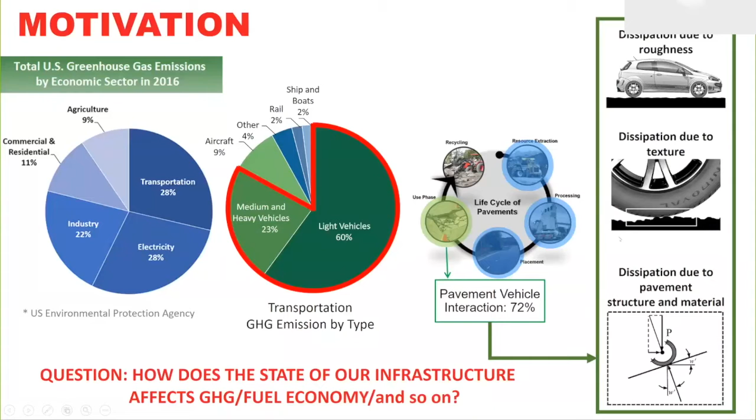Pavement vehicle interactions make 72% of the overall life cycle of pavements. It is due to roughness, dissipation due to texture, and dissipation due to pavement structural and materials. Specifically, what I'm looking at today is roughness.

Now, in a larger context, I want to raise the question here: are we doing the right thing for our infrastructure, or are we just living out the glorious time of the 1950s?

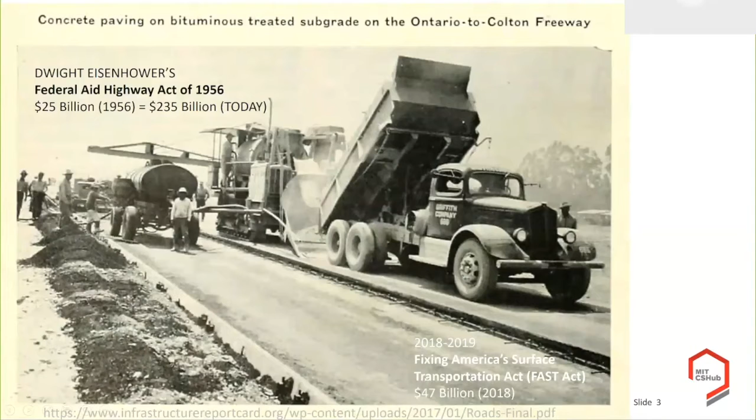On the order of $47 billion in the Transportation Act, the so-called FAST Act. It may thus be not surprising that the American Society of Civil Engineers, in its infrastructure report card,

gives the infrastructure, the road system, a grade D.

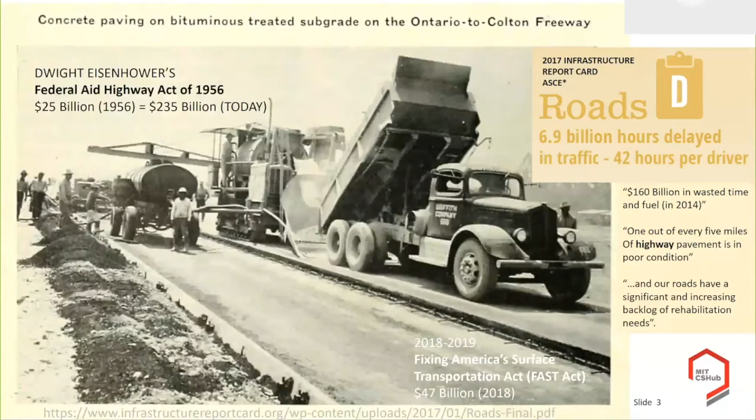With the following notations: there are about $160 billion wasted in time and fuel. One out of every five miles of highway pavement is in poor condition, and our roads have a significant and increasing backlog of rehabilitation needs.

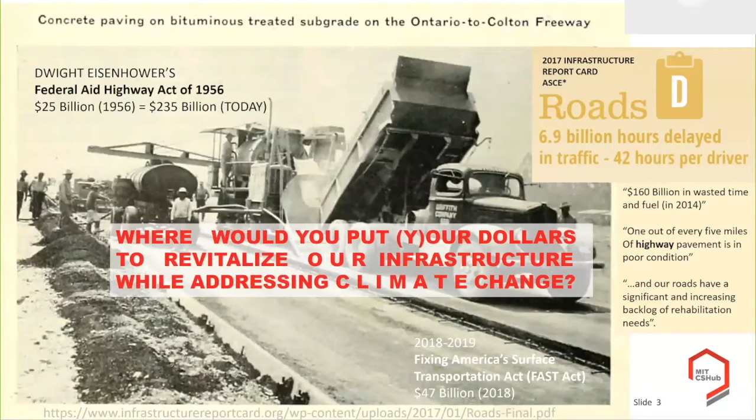So the question which I ultimately want to answer, not today, but start actually the discussion, is how can we address this? Where would you put your dollars to revitalize our infrastructure while addressing climate change?

In fact, that's what I want to do. We may be able to find out if we use smartly our smartphones. I want to convince you that we will be able collectively to provide quantitative data for decision makers.

For instance, for highway bills, but also for local bills, to assist cities and communities to reach their climate goals, for instance their CO2 emissions.

Value infrastructure for sustainable growth of our society, which has been more and more put on the back burner, that there's a value to infrastructure, and ultimately empower citizens to contribute and take charge of our built environment.

The outline of my talk will be 4 points. I need to go a little bit into the background here in order to show you how, by means of smartphone, we are able actually to predict roughness, look at excess fuel consumption, and be able to predict, to be quantitative.

I want to introduce you to an app which my students, but particularly Jake and Shahd, developed. It's called Carbin. I want to show you what this can do for you.

And then bring it all the way from an individual measurement with one phone to crowdsourcing, and introduce to you the potential of the Fix My Road project, showing network applications, vision, impact of crowdsourcing before coming to conclusions and timelines.

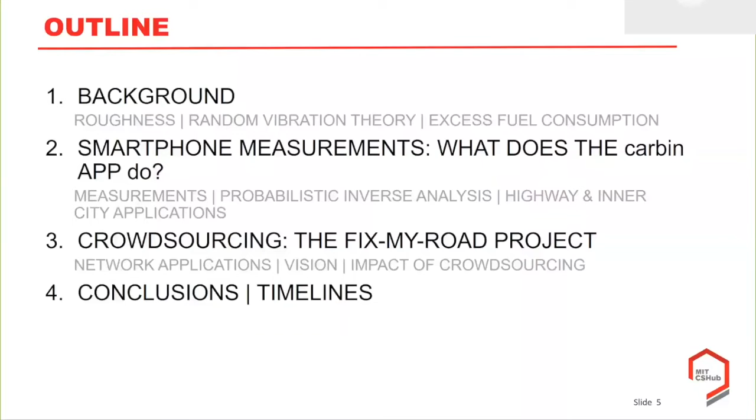As background: a common measure to quantify ride quality is the so-called International Roughness Index, IRI. It was introduced by the World Bank in the 1980s and then quickly adopted all over the world to quantify ride quality. Now, what is this roughness?

Well, the roughness basically here is the average movement of your suspension system, not in your car, but for a reference car, the so-called golden car, over a given distance length, from this measurement at a given speed V0, which is 80 kilometers per hour.

With this measurement, which can be done for instance by lasers, one can classify roads in different ways, as long as this IRI measurement is given in meters per kilometer or millimeters per meter, or in the US in inches per mile.

Here's the conversion factor: 1 meter per kilometer equals 63 inches per mile. This basically covers airport new pavements, older pavements, maintained unpaved roads, damaged pavements, rough unpaved roads, etc. The value for new pavements could be corrected a bit further downward. New pavements today can easily be done with an IRI value of 1, or 63 inches per mile delivered.

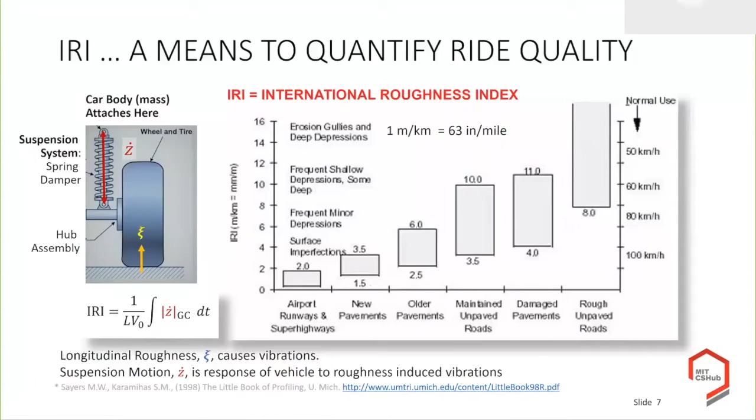So how would we actually know how this roughness introduces excess fuel consumption, environmental impact, etc.? For those less familiar with Fourier transforms, what I mean by roughness is what a surface may look like if you measure the roughness of a certain profile of the street.

Now, if you decompose this signal in the driving direction into different wavelengths, you have K, the wave numbers, from large numbers to small numbers. Then you can represent this in terms of spatial frequencies, and we wonder how much these frequencies affect fuel consumption.

For roads, typically when we look at roughness in terms of IRI, we look at wave numbers between 0.35 meters and 90.9 meters. For even smaller wave numbers, this is something which affects the texture of the tires, which also introduces additional fuel consumption.

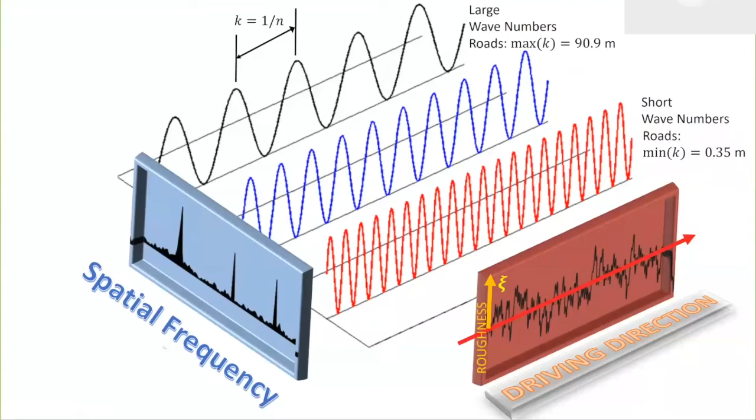So what we classically do to infer IRI from measurements, as an alternative to measuring how much in time your suspension system moves, we actually use the following form.

Here's this transformation as a function of the spatial frequency. It's called power spectral density, as you see here.

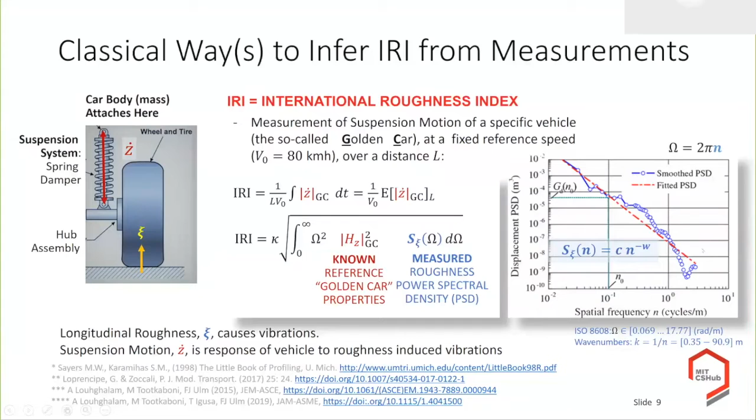If we have this measured roughness power spectral density and multiply it by some response function - this roughness to which your tire is subjected - and integrate this in some way, we are able to calculate this IRI by just knowing these relations plus these known reference golden car properties.

Well, how does roughness lead to excess fuel consumption? You immediately understand this if your suspension system is moving up and down. Each time it moves up, the speed squared times some damping coefficient will lead to an energy dissipation.

Energy dissipation means the loss of energy which we put into the system through fuel into our cars, and then we can calculate the energy dissipation or the excess fuel consumption that results from the suspension system. We may want to add the energy dissipation that occurs in the tire, but today I will only focus on the suspension system.

There has been long-standing work done by Professor Chatti here in the United States to identify the excess fuel consumption percentage as a function of this IRI measurement, and it depends on the speed, etc. Clearly, the rougher it is, the more excess fuel consumption we consume because we don't like a rough ride.

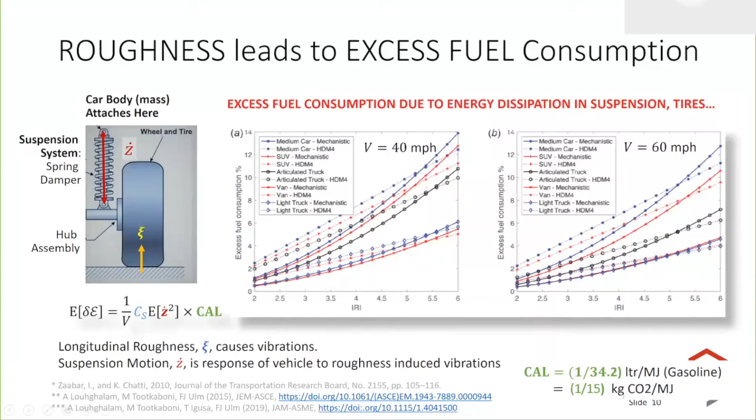In addition to CO2 emissions, one can think about particle matter, NOx, and many other things. More specifically, I'm very much interested in identifying not only the amount of fuel which we spend in excess of just running our motors at a given speed, but this excess fuel and environmental impact that results from the roughness.

In fact, one can analytically determine this. If we have a measured roughness, we multiply it again with some function where the vehicle properties come into place—but this is your vehicle, not a reference vehicle, which is used classically for IRI. We are able to determine the excess fuel consumption, the energy dissipation in the suspension system. So a key input here is this roughness value, and the vehicle properties of your car, if they are known.

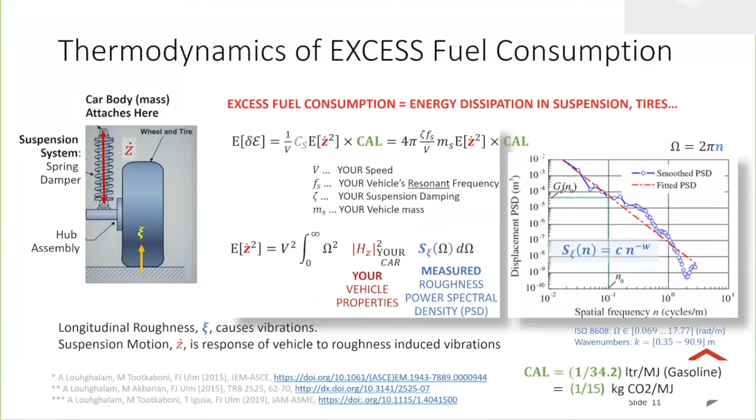Now, how does that relate to smartphone measurements? In a smartphone, all smartphones today have acceleration built in, so we can actually record in time the acceleration of a smartphone, specifically the vertical acceleration. We can then relate this acceleration in a similar fashion to, on one side, this roughness characteristic power spectral density of the road on which we are driving—that's dependent on the geography—and multiply this with the appropriate properties that relate to your car.

But what we would need for that is to know the properties of your car. The theory is now relatively well established, so it should be pretty much straightforward in a forward application, if this was known, to determine how much energy we consume. However, obviously, we don't know your vehicle properties, nor do we know what the roughness properties are.

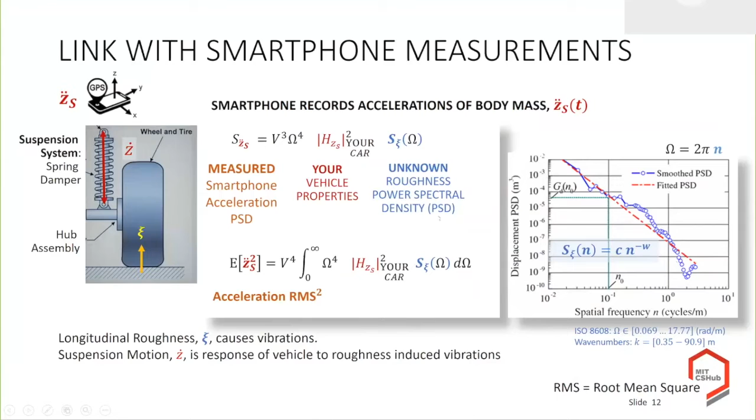We don't have a laser profiling the road. So the question of this approach consists of taking smartphone records, the acceleration of the body mass—a phone fixed smartphone attached to the body mass. We need the speed, and we need the position in order to map it.

And the output, in return, what we would do by an inverse analysis is to determine the vehicle properties, the roughness power spectral density, and of course the International Roughness Index, which is used for many other applications, particularly for maintenance, the excess fuel consumption, environmental impact, and ultimately the mapping.

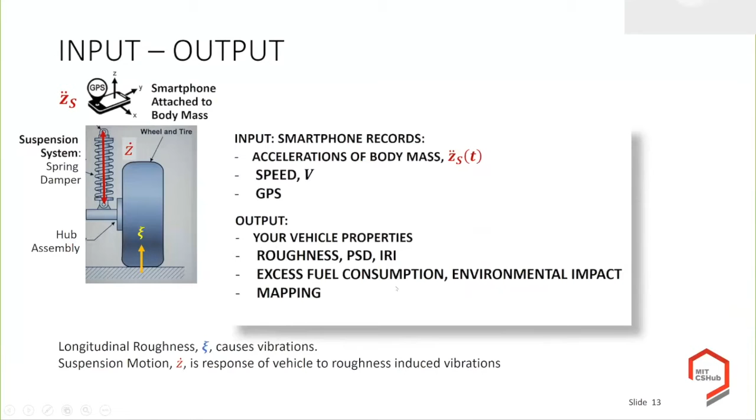Now, this may sound so straightforward that one needs to go backwards and realize, well, this should have been in the books for quite some time. When you make a literature search, what exists are basically three types of approaches. One is an ad hoc engineering approach: if you have an acceleration, you integrate it twice, obtain some displacement, and eventually relate this to roughness. Of course, if you do this, you assume basically that you drive a rigid vehicle, so that can be but an extremely rough estimate of the system.

Actually, this type of technique came from the pothole bump approaches, which there are many of out there, which register the occurrence of potholes in the street by means of acceleration. But it has been applied also to IRI. The problem here is that this assumes a rigid vehicle.

Then there are many correlation approaches out there. They go all back, I would say, to a patent which Google brought forward, where you correlate something to the IRI, which you measure from the acceleration, and hope that the correlations will work. The problem with correlations is, of course, that they're not necessarily transferable unless you have artificial intelligence, etc., which learns permanently the entire system. So you need to calibrate already your artificial intelligence in order to have the answer, which of course limits this approach. In addition, it does not consider all the fine things which one can actually do with the accelerations.

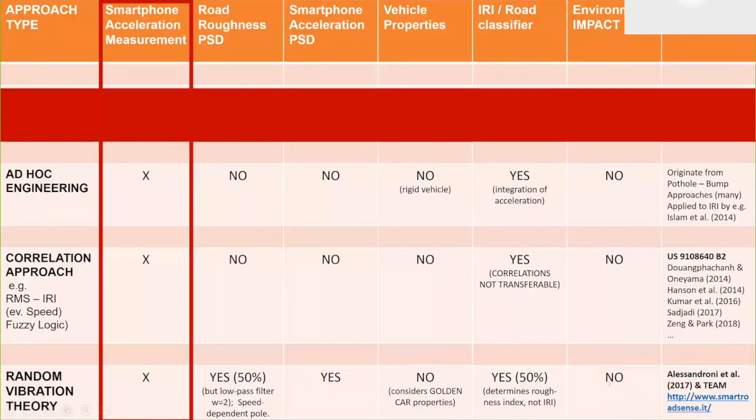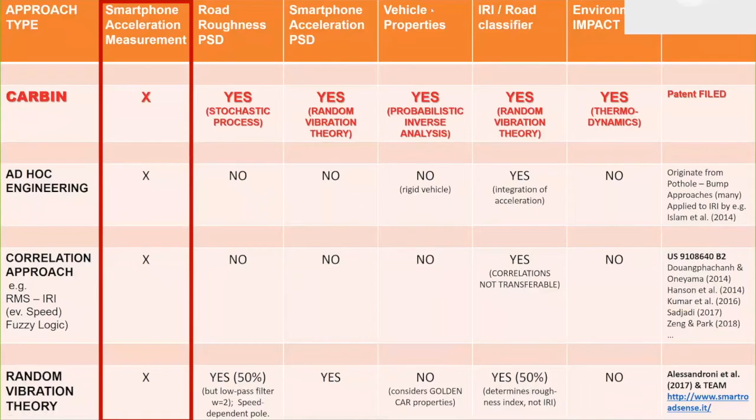Because of this, we wanted to bring all these different elements together with Carbin, where we considered the stochastic process, the random vibration theory. Vehicle properties need probabilistic inverse analysis, IRI classifier from random vibration theory, and the environmental impact from elementary thermodynamics. That's what we call the Carbin approach, which is in this app.

It started as a student project. It's currently a research tool, but has all the potential to move into startup technology as we try to scale up these measurements for a large-scale application of this app.

So how does this Carbin app actually work? You have the classical situation: a smartphone mounted in a fixed position inside the vehicle—it shouldn't move too much. There's a Carbin algorithm we developed based on probabilistic inverse analysis, which my colleagues at UMass Dartmouth developed to extract road quality, vehicle properties, and excess fuel consumption information.

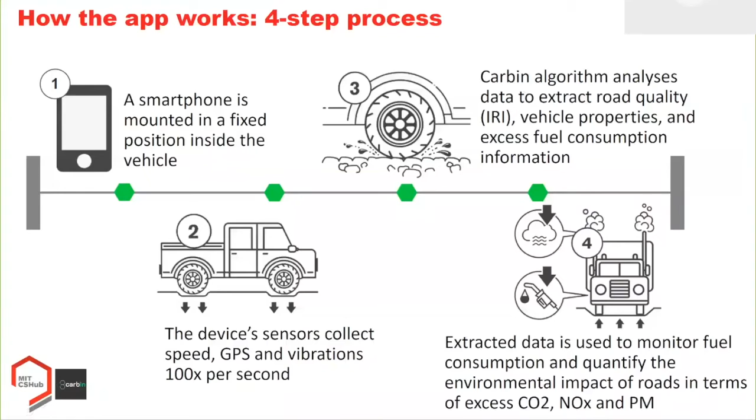The smartphone sensors collect speed, GPS, and vibrations at a frequency typically of 100 per second—that's 100 hertz. With this information, we can monitor fuel consumption and quantify the environmental impact of roads in terms of excess CO2, NOx, and particulate matter.

Now let me walk you through some measurements. Here's a measurement I took one weekend driving back from Western Mass, over about 13 minutes.

Typically what it measures is the speed, from the GPS record. You see these spikes here—they come from the fact that the GPS system takes some time; this is the frequency of the recording.

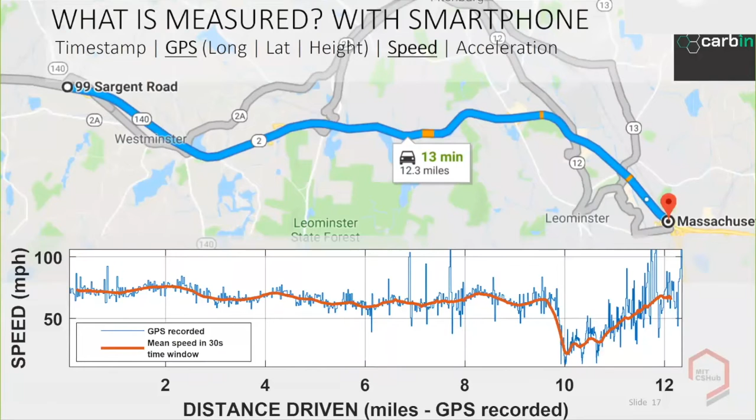When we analyze the roughness and fuel consumption, we put ourselves in 30-second time windows, in order to have data to evaluate the roughness-induced fuel consumption.

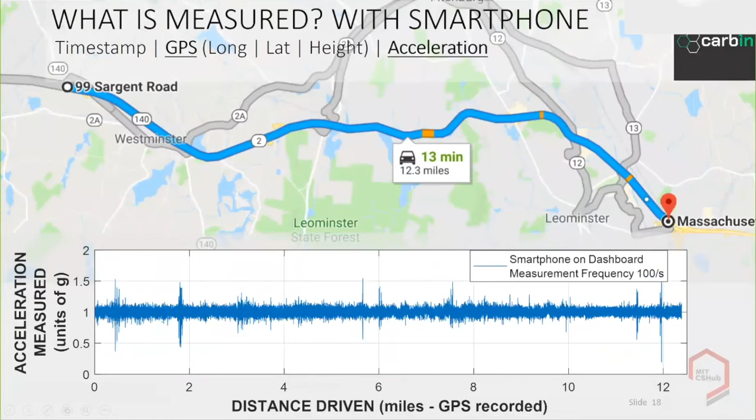A second measurement is the acceleration. There's a lot of measurement, 100 hertz, so 100 values per second recorded by the smartphone placed on the dashboard.

Now what do we do with this data? We have a moving time window that moves forward with a certain delta t, roughly every second, and within this 30-second time window we take the acceleration and make a Fourier transform of it to determine the acceleration power spectral density.

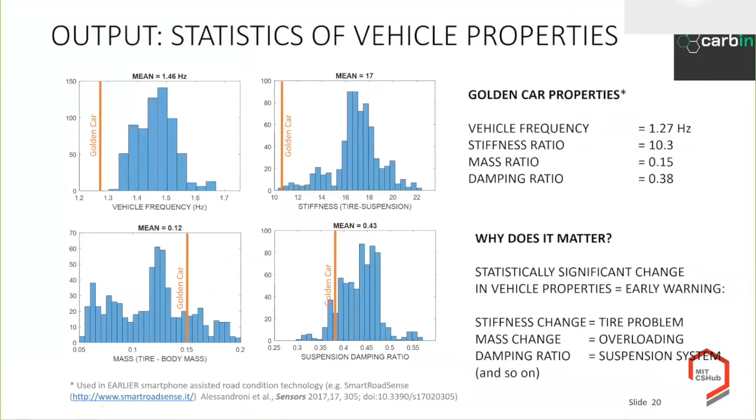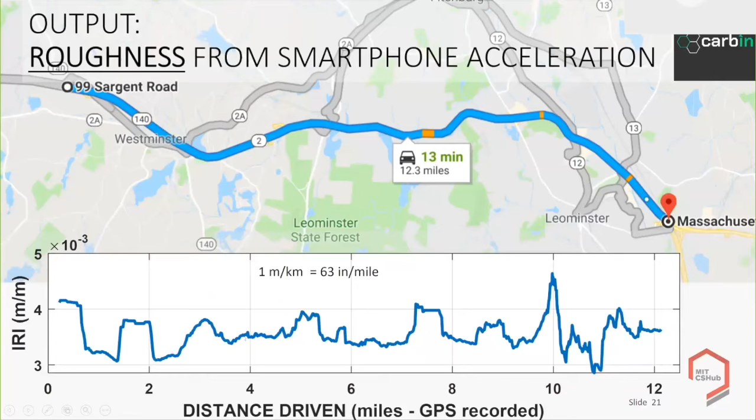Note that 1 meter per kilometer is basically a new pavement. So you see that we are here actually at quite variable IRI.

In fact, I took the work, this is from Western Mass, and looked at the Mass.gov web page in order to identify when there has been some work done recently. And actually this part here was resurfaced in 2008, 2009, so some 10 years ago. You still see a little bit of an effect, but it's already wearing off very quickly. Also, the resurfacing that happened in this part in 2012, even though it's a little bit better than the rest of it, starts wearing off.

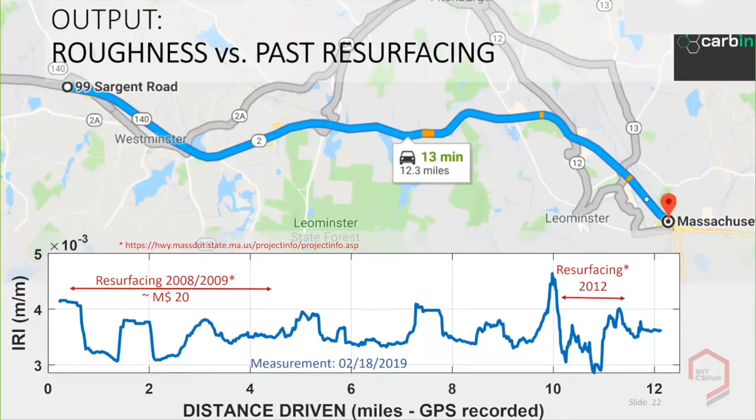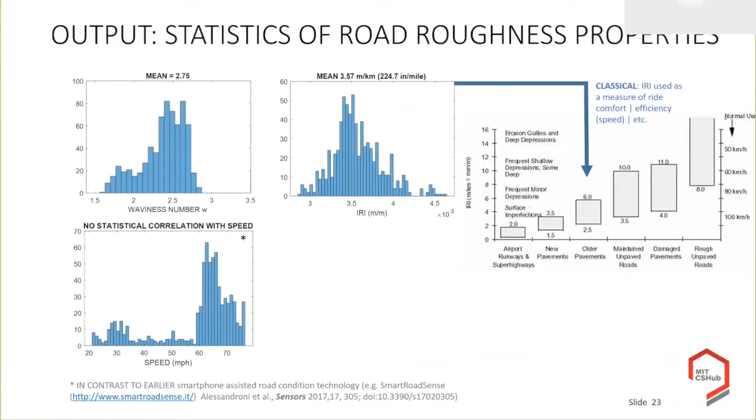And of course, this is just one measurement. But if there are sufficient vehicles driving over this part, you can continuously monitor the roughness of the road. In fact, you can also look at the statistics here. So, for instance, in terms of the roughness, you see there's a certain distribution. If you want, you can take the mean over this 10-mile stretch. In essence, you identify, well, this is an older pavement, and this can be a guide for the DOT to take decisions when to intervene, either locally or for this entire segment, to reduce the roughness by means of resurfacing.

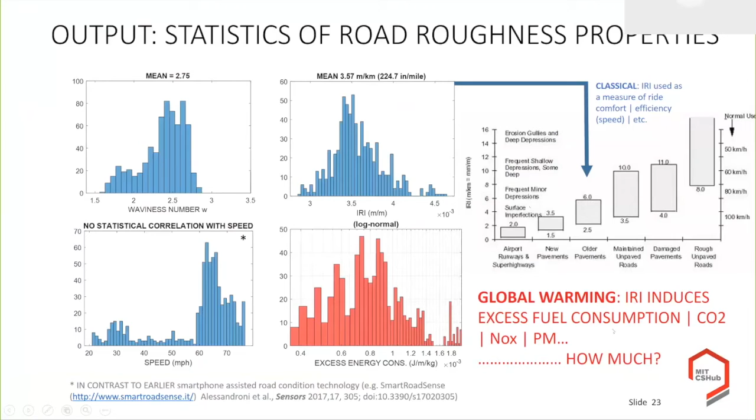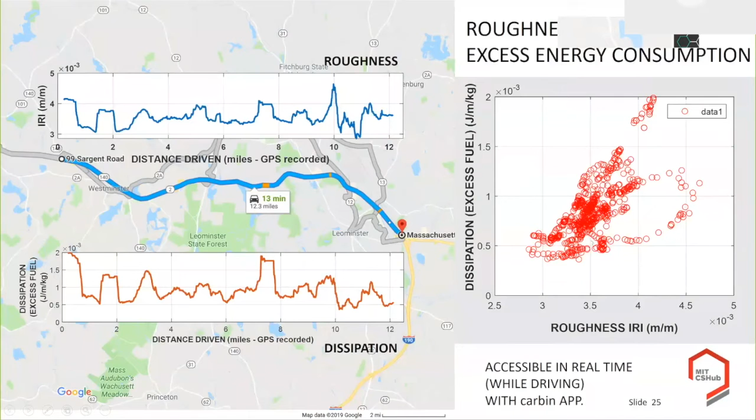So this allows us to address the following issue: that IRI induces excess fuel consumption, CO2, NOx, PM. And of course, how much is it? Well, we can plot this along the way. But what is more interesting is to bring together the roughness and the dissipation, the excess fuel consumption, and the roughness of the system. Clearly you see that this roughness leads to energy consumption. It's not really a linear relationship, but you have access to this quantity in real time while driving with your carbin app.

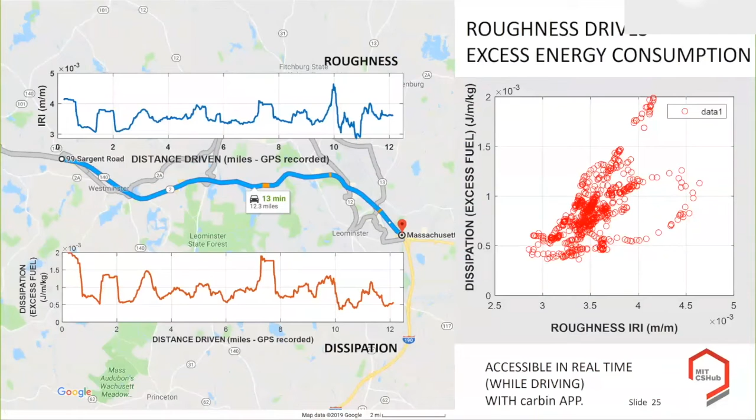Now, how much fuel is this? You can integrate this, and you'll realize for this relatively short stretch of the Route 2 highway system, it's not much fuel that we spend. It's 30 milliliters, which is roughly 2 to 3% for my highly fuel economic Jetta 2017. You can translate it into 70 grams of CO2, so it's not much actually for me as an individual, at least for this small part, just 2 to 3%.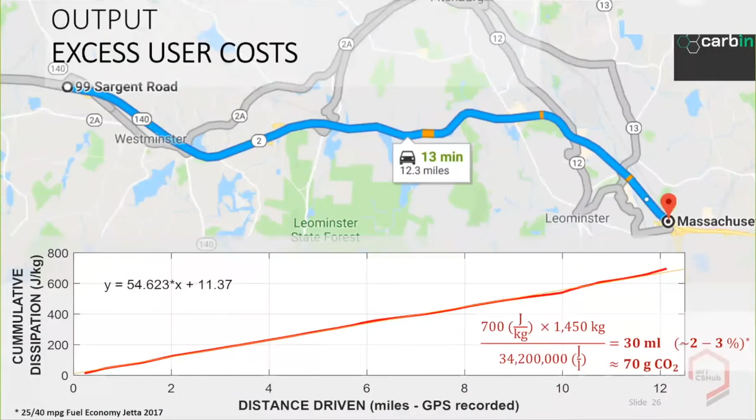However, if you just plot this, you see this is sort of the amount of what 30 milliliters of fuel would look like. But if you take this for the entire road, for this entire segment, and consider the average annual daily traffic for this segment, you realize it's not that little. It actually amounts to 1 barrel of gasoline per day and roughly 280 kilograms of CO2. So per day, if you then scale this up for the year, these numbers become significant.

Just another application, because I have data here from Massachusetts. The Mass Pike is sort of the flagship of the connection between Boston on one side and Worcester.

So a friend of mine drove yesterday from MIT visiting me to Worcester, and I asked her to measure the roughness and send me the data. So what you see here, the Mass DOT maintains it. I have put this now here in inches per mile for the use of people who are more familiar with inches per mile.

You see, we're here sort of around 150 to 200 inches per mile. So we know that this is not far away from a need of redoing this here from a roughness perspective.

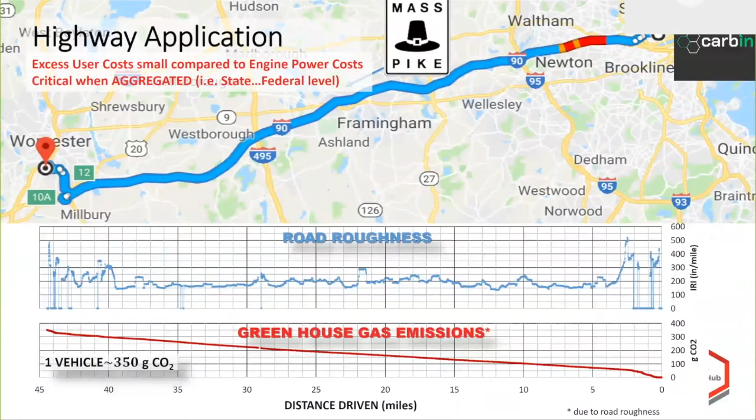Again, because it's a highway application, the excess user costs in terms of petrol are small compared to the engine power cost, but it is critical when aggregated, i.e. when we go at state level, federal level, and need to address this here, those 2, 3, 4% make all the difference, because that's something which we can influence by appropriate maintenance schedules and the right choices of the segments, which are critical for reducing the environmental footprint and the fuel economy.

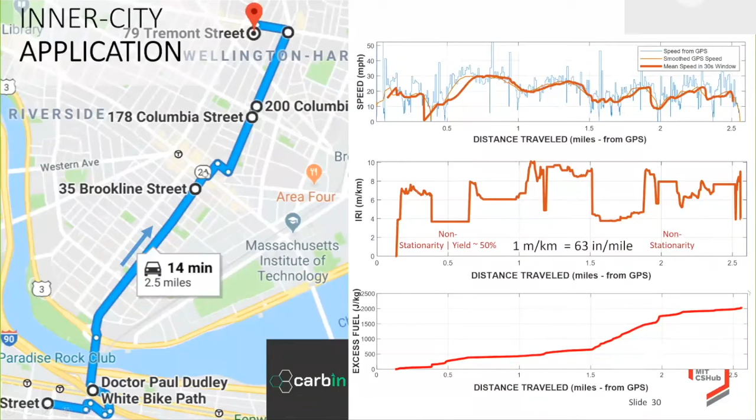In fact, well, first of all, let me say something about resolution. So this is around Inman Square here in Cambridge, just to give you an idea about this resolution. So if you take a street here, this is basically at block level.

You see here the measurements which are done there, extremely consistent. You see Hampshire Street actually is in a better state, was redone a couple of years ago. Prospect Street, this part here is also consistent value, but much higher, so that may need some retrofitting in the future. So that's sort of the spatial resolution which you get.

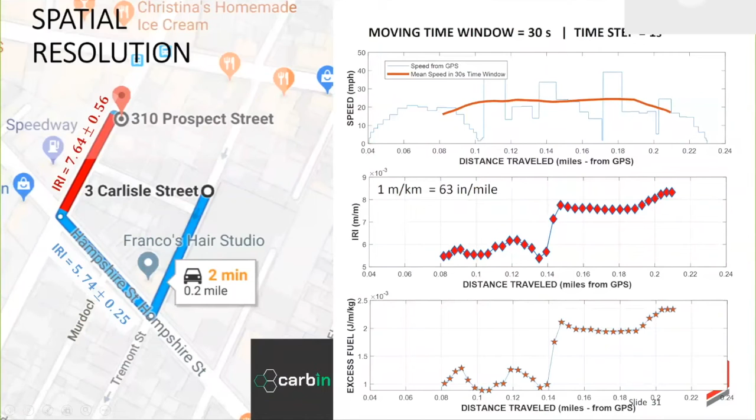With your smartphone combined with the algorithm. Well, there's also some difference you can look at, so left and right wheel, because there's not only one roughness, but the right side is often more deteriorated, particularly on this path.

So we had measurements done with 2 phones together with my daughter, where we saw that there are parts of it where the right wheel is subject to higher roughness than the left wheel, which allows us then to integrate that into the excess fuel consumption.

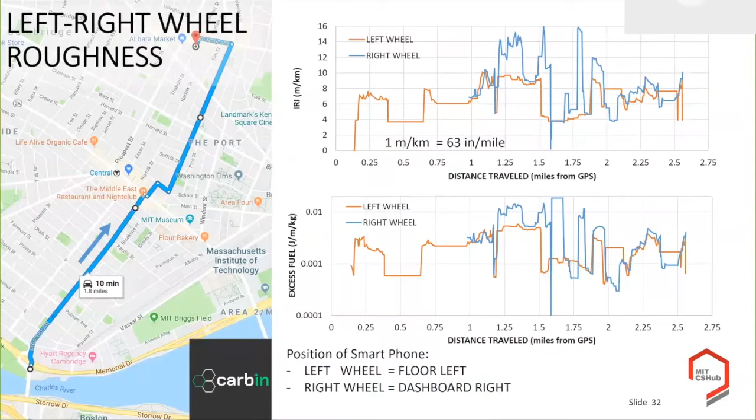But first of all, let's say, where are we with this roughness? If you look at the values, we're basically talking about the state of the road system, at least this part here in Cambridge, being basically the equivalent of a maintained unpaved road. And I think anybody who ever drove in Cambridge knows that there are issues with the system. So it means that these need another level of maintenance or choice of budget allocation just from a roughness perspective.

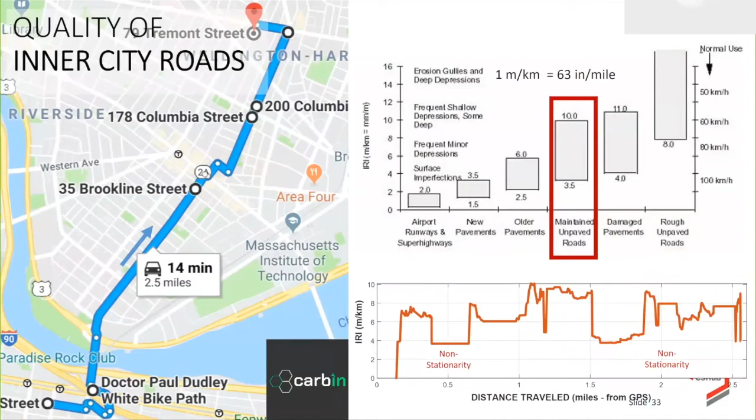But why does that really matter? It actually matters because of the excess fuel consumption. So just to give you an idea, this was 2.5 miles, so it was 1/5 of the way which I showed you before, which I drove on the highway. But I have 3 times as much fuel consumption. So for 1/5 of the distance, I have 3 times as much excess fuel consumption for my vehicle.

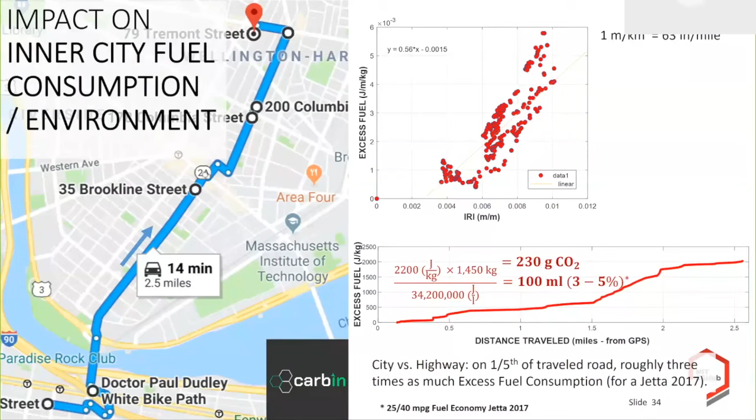So that amounts to 3 to 5%, because we all know that we get much less miles per gallon in a city. Which means, just to give you an idea, that's a full cup here for 2.5 miles, which means the CO2 impact, but also the other environmental impact factors in a city, are really detrimental for the quality of the air.

And then really you realize that for this small segment alone of some 2.5 miles, if there are at least 1,000 vehicles per day, because that's one of the ways into Central Square in Cambridge, well, this comes basically also to a barrel per day, and that's a very densely settled population.

So then, of course, you can look at vehicle properties again. In a city, you obtain similar types of properties, and they are quite different from the approach previously used using the golden car properties.

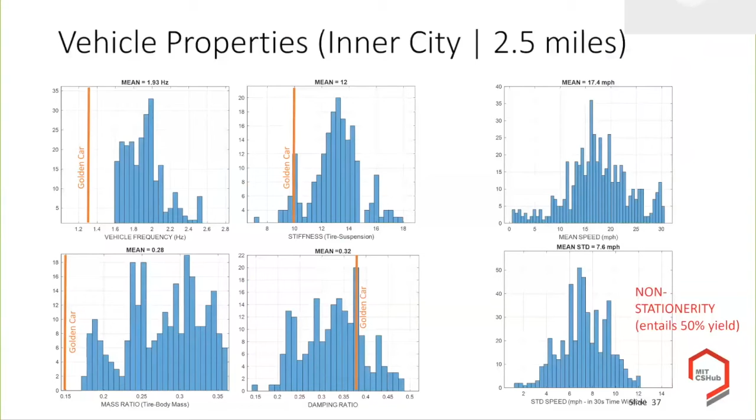So you can then check whether there's equal mass distribution, left, right, etc. These are interesting things one can do with the outcome of it, about vehicle properties of the system.

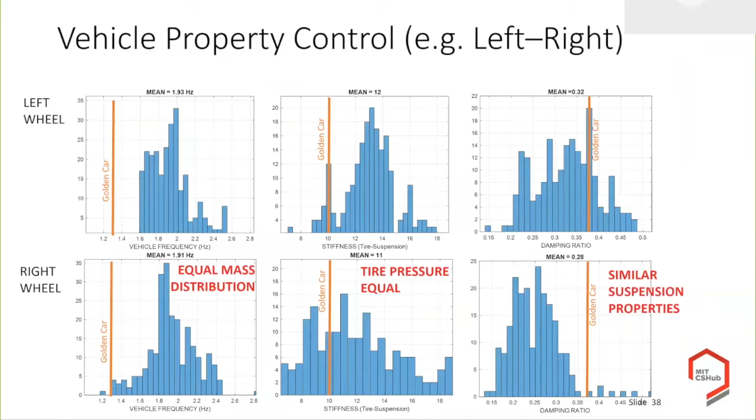Also, Jake actually drove this year with his car — I forgot what it was, I think his brother's car. As he sent me the data, I made the analysis. I told him, you have a problem with your car, particularly with this first run here, and I asked him, was this an outlier or do you have problems?

Soon afterwards, he came back and said he had to redo the steering system. Had I analyzed this before, I could have simply shown him, by looking at the resonance frequency before and after the repair, which I didn't know from this distribution. I could have told him more quantitatively about this problem — not in terms of mean values, but using higher statistics to analyze the quality of the vehicle properties.

So just to summarize the checklist: we looked at speeds, recommendably greater than 15 kilometers per hour. Non-stationarity is something which affects the output — it's what we call the yield, how many data points you get along a route.

The vehicle type we checked with now 4 cars, so I didn't redo this here. We still need to validate for vans and trucks. We checked that this is insensitive to the position of the car when it comes to roughness measurements. Of course the vehicle properties depend on where you measure it, but for that you can use different types of models — quarter car, which we run on the app, half car, which we can run on a server, or full car models, depending on the type of accuracy we want.

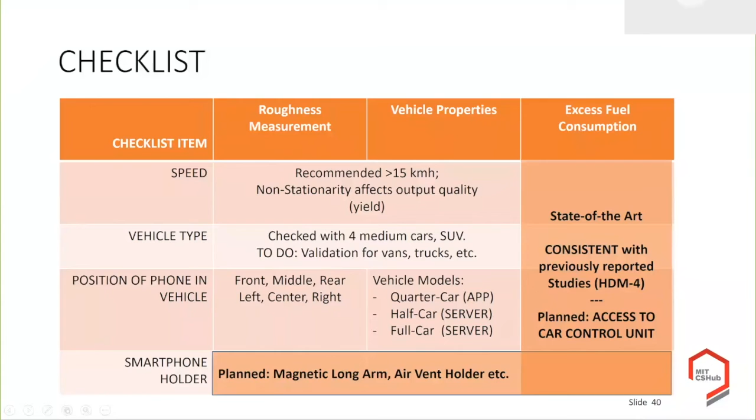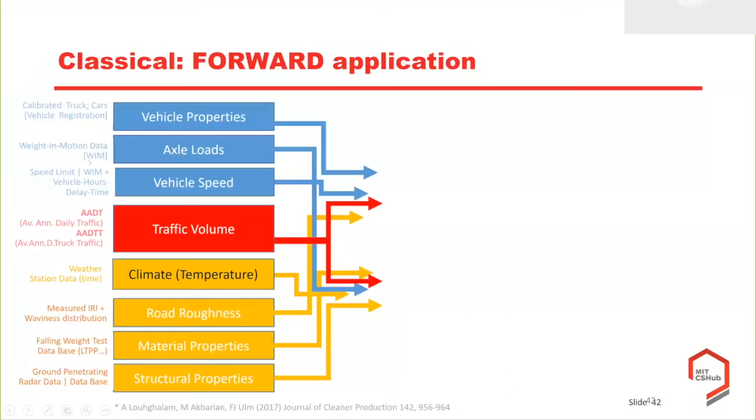So how do you take the single measurement now to the crowdsourcing of it? Well, in fact, we have done some of these things in a completely other way for the state of California, for Virginia, and other states in the United States, where we had, from the vehicle registration, trucks and cars amounts, or the average vehicle properties. We had weight-in-motion data which gave us the axle load, the mass of the vehicle, and we had speed limit or vehicle hour delay times to get estimates of the speeds.

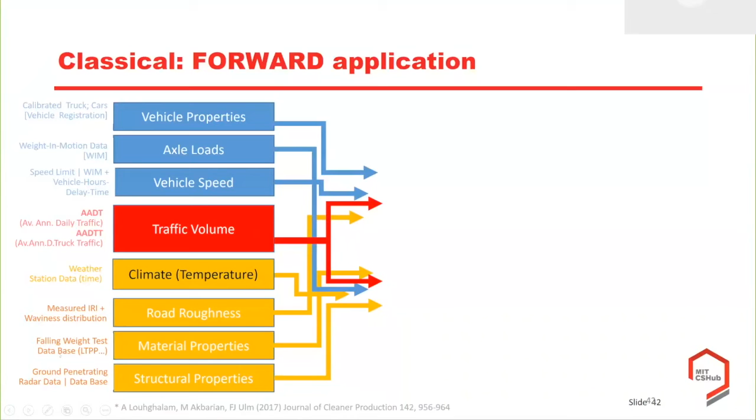We had the traffic volume, climate, temperature, IRI measurements from road roughness measurements done by the agency in a very costly way, and then material properties, structural properties going forward. Using this data, we are able to determine, in a forward application, this excess fuel consumption. It takes a little bit of big data analytics — just to give you an idea.

So this is the input for the Caltrans state highway system — roughly 50,000 miles where we had the roughness measurements of the state. We had the annual average daily traffic, the truck traffic, etc., and these routes are important here. All this data is collected by the state agency, maybe every second year, so it's often outdated because we can only do it once it's already there. So we have no means of intervening early enough in this process.

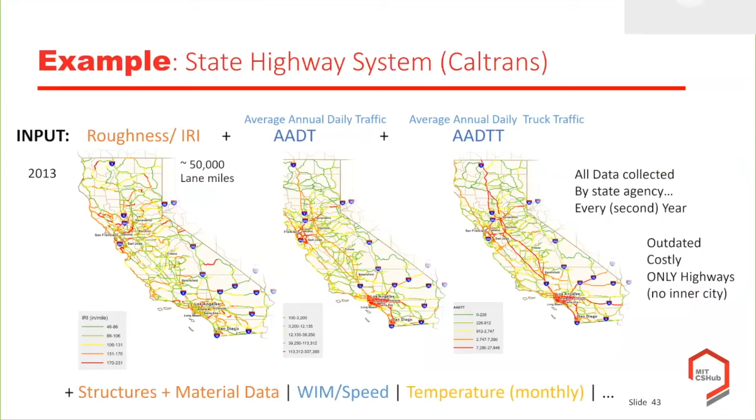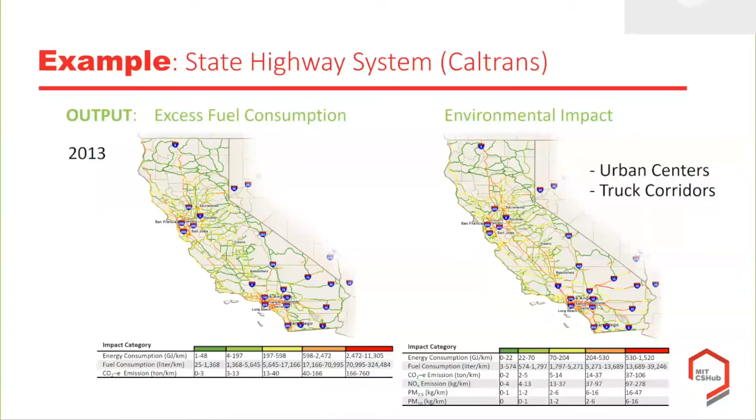Now, what we can do with this data is basically show, if we have all this data, we can design for a state how much you need to do, and what you get out in terms of excess fuel consumption reduction if you take a certain amount of lane miles which you repair.

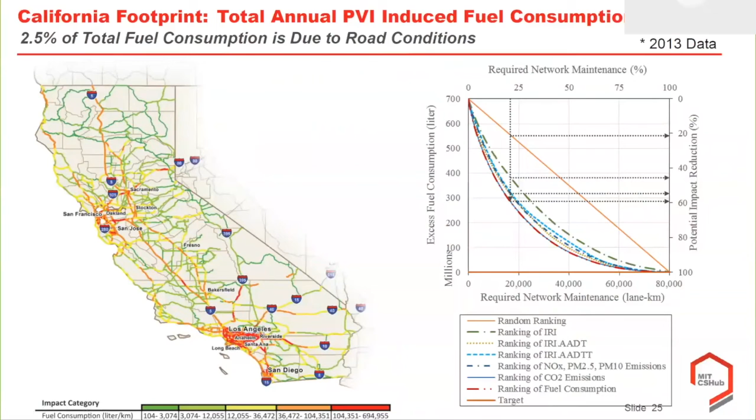So as you see here, with this approach, maybe just 20% of the roads, you would actually obtain a 60% reduction if you have all these values together. Now this is based on historical data, but with the smartphone, we get a large chunk of these values already, and could do this in real time, while obtaining vehicle properties without going into the database.

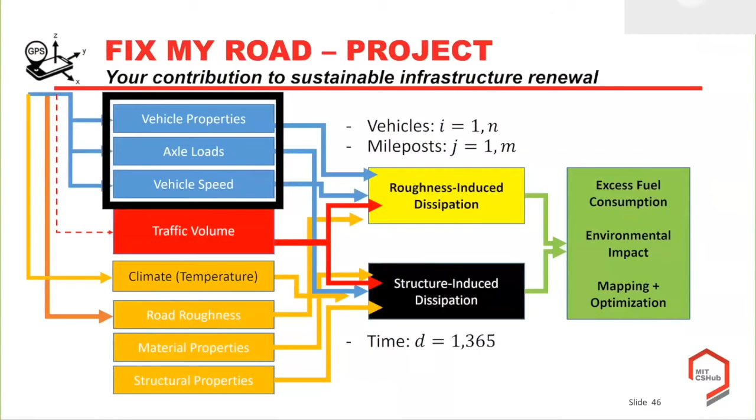And that's the idea of the Fix My Road project, where we have this ambition to geographically and in time map every mile of pavement in our country for roughness, vehicle properties, excess fuel consumption, environmental and economic impact, with the objective to provide quantitative data for decision makers.

I think decision makers, as I saw in contact with California, are extremely sensitive when it comes to the environmental impact of their communities. Not so much maybe at the federal level, but at the local level, state level, and in the cities, that for sure. This can assist cities and communities to reach their climate goals.

I live in Cambridge, and knowing how much excess fuel one consumes because of the road condition, it is where my kids play on the playground. And where I realized that there's a value of infrastructure for sustainable growth of our society in the city and beyond. And if we have enough people, I think we can empower citizens to contribute and take charge of our built environment. My daughter is in high school here in Cambridge, and she and her classmates are enthused by this idea and want to take it to the next level as they learn driving, measuring this directly.

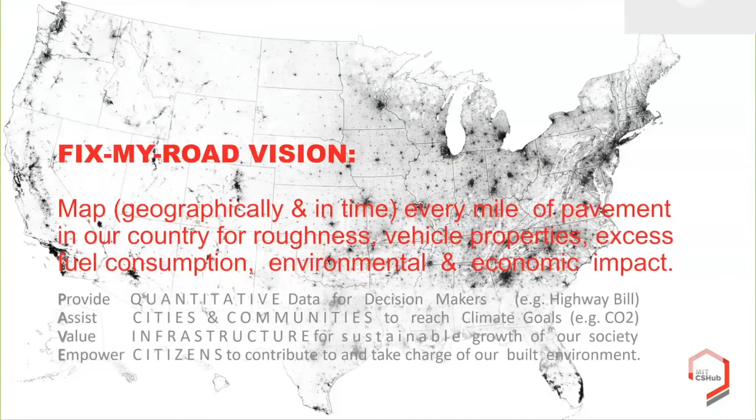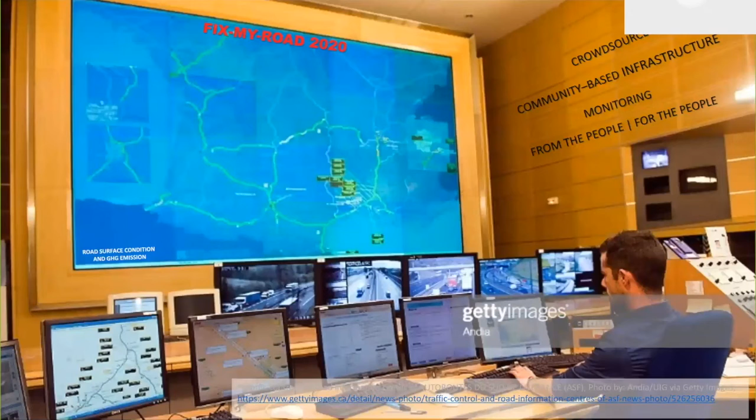And I don't know whether it will one day look like this, but hey, this is crowdsourced, community-based infrastructure monitoring from the people, for the people, where you can basically identify for decision makers, this road needs fixing, for environmental impact if you want to reach your climate goals, from social equity of people who commute a lot, which means also a lot of environmental footprint. So this has, I believe, a good chance to change our relationship to infrastructure.

Just to conclude here and leave it up, we would like to go forward with this project. It's the first time that we speak publicly about it. We're working on this, and we have the app now.

It's right now only works on Apple. We have contacts with someone who helps us develop the Android version of it, which—not today, but if you wait until tomorrow—you get this display of roughness and excess fuel.

Then we want to acquire data, and we're in discussions with some students here at MIT who will help us, hopefully, so that the class of 2019 of MIT students actually collects the data, basically maps its environmental footprint over the spring break, over the next month. We want to move forward then with a better version.

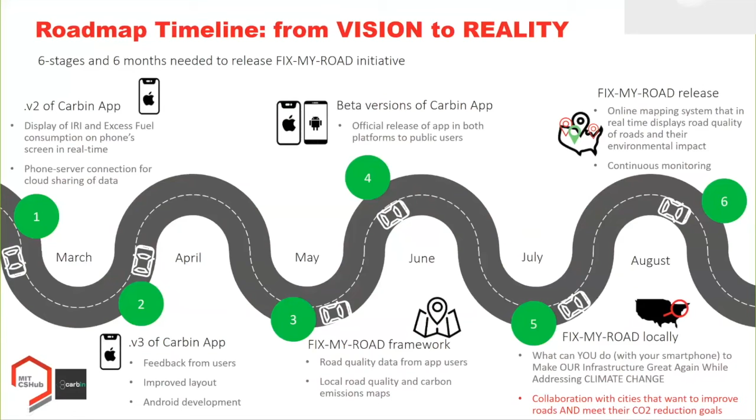So after all these preparations, around Labor Day, before Labor Day, we would launch the Fix My Road project, and hopefully have enough buy-in from people so that we get a representative number of participants to map the road. With this, I would like to thank you. I hope you will join us in this effort, this Fix My Road, and I'll take questions.

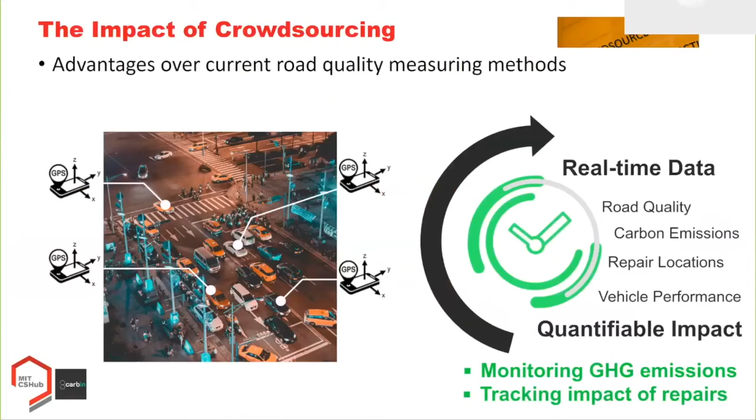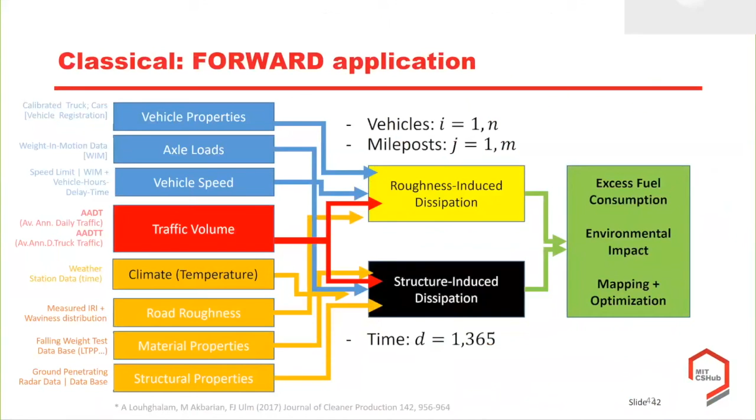Okay, so first of all, the IRI—I do understand this—IRI is the response, the average slope that a reference car, the so-called golden car, would have if it drove at 80 kilometers an hour. Let me bring this back to the quantities of relevance here. That means...

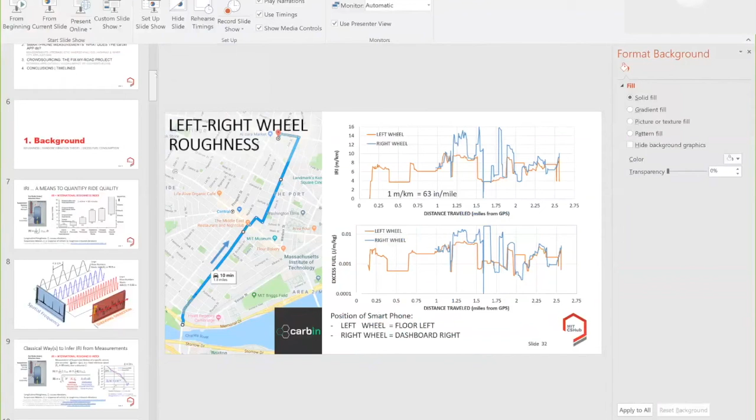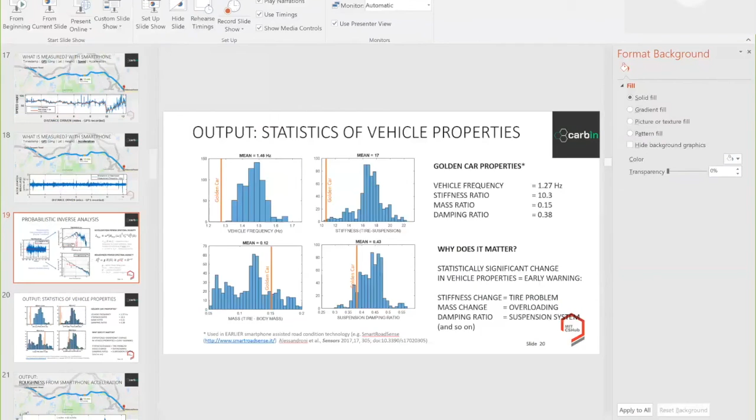Here's another question along some technical lines. For the inverse application, do you use the PSD of the acceleration, the location of the phone, the quarter car model? What else do you need to improve the quality of the estimation?